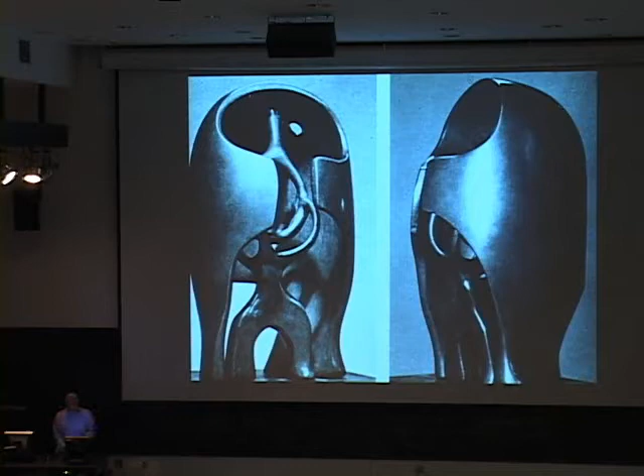In this case, there are two very different figures. So there's an exterior and an interior, and a zone of difference in between. Simply what we did is to label the outside of the helmet—the outside of the outside—the inside surface of the helmet—the inside of the outside. And as we move through these zones, the meanings change: outside of the outside, inside of the outside, and then there's a space, and we call that space the glue, which associates the inside of the outside with the outside of the inside. So it's the outside of the outside, the inside of the outside, the glue, the outside of the inside, the inside. And each one of those pieces obligates one another. They're different, they have different meanings, and in the aggregate, we have conceptually an architectural model.

This is a quick couple of minutes, since you've spent the last several years studying the history of architecture, so I'm going to save you a lot of time and tell you a little bit about how it was done and what it might mean. I think the premise is that architecture does not make its own argument by itself, but rather it associates or attempts to associate with cultural, intellectual, with artistic pedigrees already proven, and says, this is us, this is what we do. It makes those associations in a number of fields.

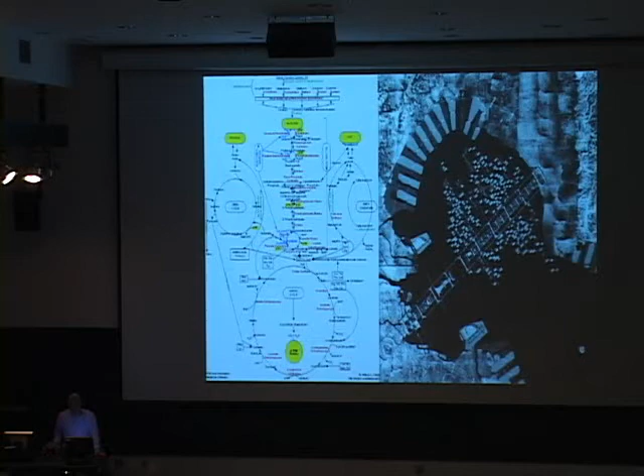In the 1960s, physiology and experimental work in the science of the human body, metabolism—so architecture becomes metabolism. That's Kenzo Tange in Tokyo Bay on the right.

A little bit later along, early to mid-1970s, Paul de Man, who has an interesting history as a literary critic, began as a writer in Western Europe when Hitler came through, went to Harvard, dumped his wife and his kid, did a number of unfriendly things, wound up at Yale as a literary critic. The only reason I mention that is that those who have discoursed on deconstruction have on occasion tried to explain it as de Man's way of deconstructing his own life—that is to say, of getting rid of it.

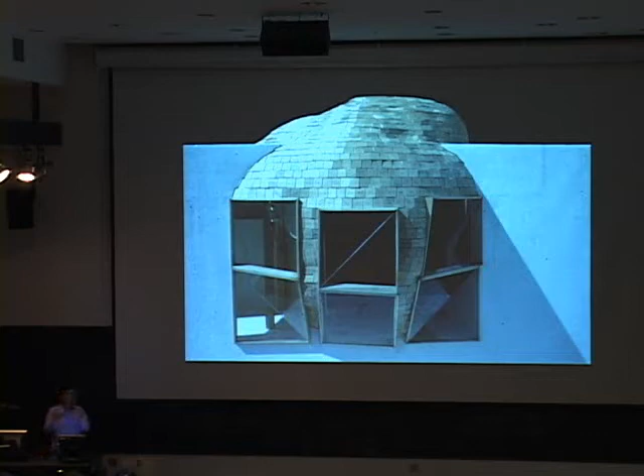We could approach it. We actually made plywood forms both on the inside and the outside in order to implement it. So what we're doing is learning how to draw it, and in the process learning how to build it. Maybe when we get to the end, we have it figured out. It has to do with joint size, edge to edge, and a whole series of technical issues.

Advent of the Rhino menu, for instance, makes the discussion very different, because a menu of this kind anticipates, or makes an effort to anticipate, that you can do this one and this one and this one, and you can do all of these things. So the catalog of possibilities is now available to you, but not 15 years ago in a menu. So it makes the delivery of the result a simpler kind of problem.

It's different to make something when you're not sure how to draw it and not positive how to build it. And there's a risk in that, in the sense that it may work and it may not. Whereas the advent of the new software might allow you to build the very same thing, but the meaning of the very same thing, whatever it looks like, I think is substantially different. It might be the image of something you don't quite know, but the tool is something we know very well, and I think the tool allows us to anticipate and to warranty what the lack of the tool didn't allow us to anticipate and to warranty.

And this is really the other side. I mentioned almost in that Mondrian comment, almost nothing and almost everything.

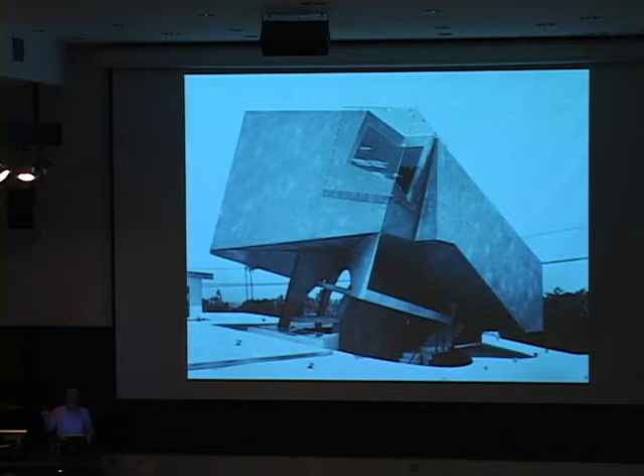This is something that we call the box, or unboxing the box, a little bit facetiously, because it's enough of a box to be known as a box and not enough of a box to be, in fact, clearly the box. And I think the box is a topic in the discourse on architecture in the last 100 years has first been a kind of ideal image, maybe in terms of the austerity quotient of Mondrian, and maybe in recent years a kind of a pariah. Don't make the box or unbox the box. The box is too easy, the box is too simple, the box is too predictable.

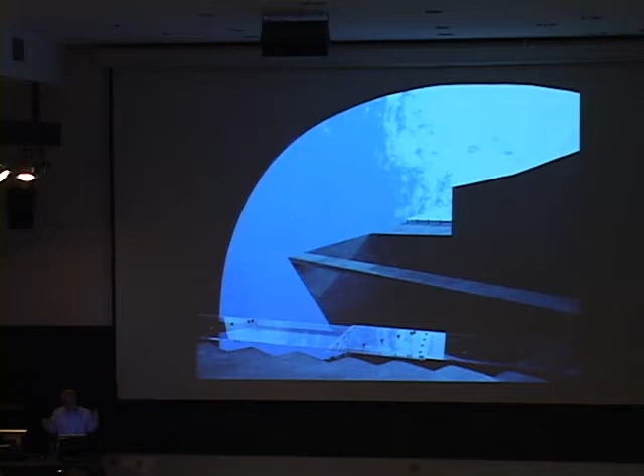So in that period of time, making Trivida and making the box, and in a sense covering all the conceptual possibilities between almost everything and almost nothing, in a theoretical sense, in those two projects.

This is a project that was done initially for the Los Angeles Philharmonic at about the time that it looked like the Disney Hall wouldn't be built. It was done for a group that produces something called the Green Umbrella Series, which is an experimental music series run in Los Angeles for a number of years and had no venue and needed one.

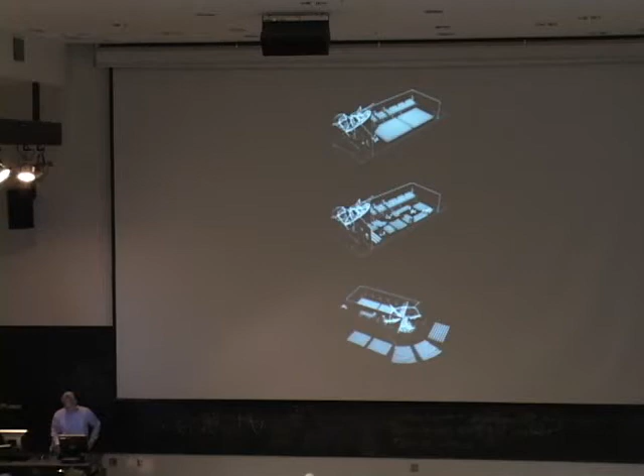Part of the operational problem was to produce a flexible interior. And the other part was to produce a kind of bandbox on the exterior for about 20 to 25 musicians from the LA Phil who would sit outside and perform.

You can start to see how the project was studied and made. There's a discourse with trusses: a new truss made out of steel, an old truss amended that belonged to an original roof, an existing truss which is exposed, and then this bent glass canopy.

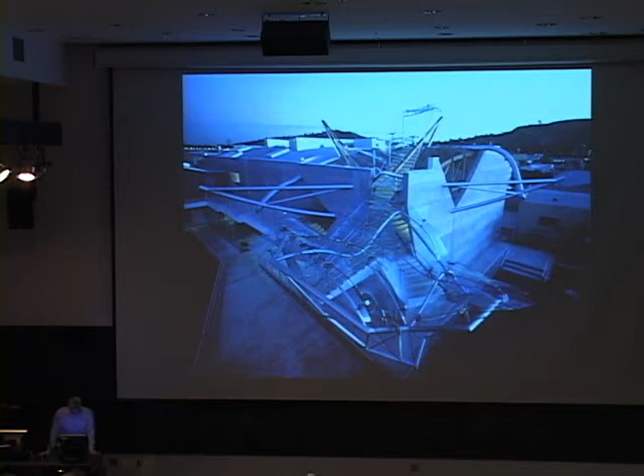I think this is the first time overhead bent glass had ever been done. You can see what we did here. It wasn't a certainty that we could make the glass, that we could engineer and fabricate it. We were told by those who always know: don't do it, you can't draw it, you can't bid it, you can't build it, you can't fabricate it, it'll break, it'll leak, and they'll sue you.

And all of that happened. Nevertheless, as your parents have always advocated perseverance, when it's 4th and 10 or something, we did that. You can see here we were trying to understand a form language that would allow us to fabricate this stuff. We finally found a fabricator near Los Angeles with some engineers in Paris and some others in Switzerland, and we were able to build it.

What's interesting to me is that people selling this glass now from Shenzhen and Guangzhou, from Cricursa in Barcelona, and other places can make this available to you. So, hey kid, you want to bend it, we can bend it, you want to twist it, we can twist it, no problem. It's not quite no problem, but the evolution of that discussion in a very short time means something interesting. It means that the time it was done and the result achieved, for better or worse, lawsuits, cracking, but it's up, is different than if we were to build it now under conditions for engineering and fabrication that have evolved substantially since that period.

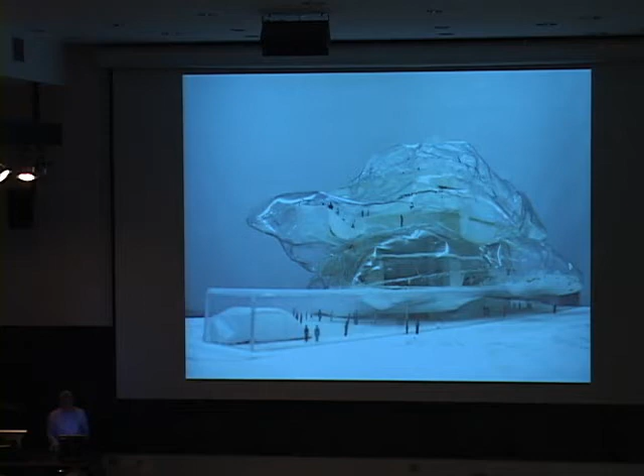This was the original proposal sketch for the project. Then we went through a series of steps working with Valery, among others, using a term you'll recognize: a module. Like the Trevita project with a block module, these are also modules. We called the modules the pillows, but the pillows are modules at a very different scale. They deal with sight lines, structure, access, and acoustics.

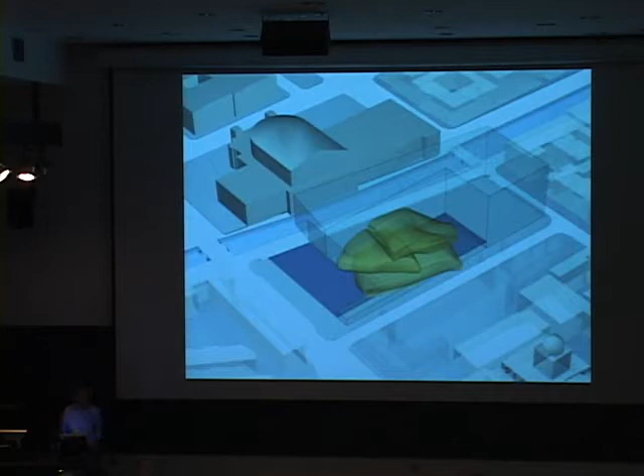So when you want to move it, you push it, bend it, stretch it—you do all of that. It's a malleable module, and we began to develop the project on that basis. This was an early study, and then a later study. The interior of this theater was asymmetrical, and then a clay model. You can see the tools—some are clay, some handmade, some printed, some milled, all of that.

This is a series of setting and dealing with the glass. In Russia we did two projects: one called the Iceberg, one called the Ice Cube—this being the Iceberg. The role of glass in this became a big topic, and a controversial one, particularly acoustically. At the time we were working with the Arup people in London. This starts to deal with—this won't go anywhere near explaining it—but this deals with acoustics, this deals with seating, this deals with the envelope, and this deals with putting all the pieces together.

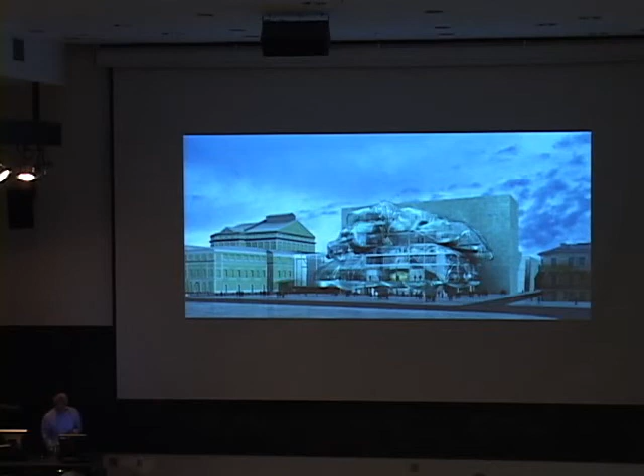So this was the solution that won the competition originally.

Then a number... the best thing to do, I think, as a lesson to you is until it starts to go up, you just keep it quiet. We were asked to exhibit it in the Russian Pavilion in the Venice Biennale, and really a lot of hell and controversy broke loose.

The ultimate result of that was the rerunning of the competition, which is this one, as you see here, modified to some extent.

But the premise we did raise, I think I mentioned this to Jeff, to the jury, was an analysis—whether this is facetious or facetiously unfacetious—that the 19th century Russian neoclassical building, which really belongs to France, divides elevations of buildings in very conventional and predictable ways.

And we went in and presented a kind of hypothesis which says this is why this building is analogous, appropriate, fits into the center of the city of St. Petersburg.

After the jury, Prix came up—he was on the jury—and he said, boy, that was a great speech. It sounded really great, sounded good, sounded convincing. And then I looked at the image and the argument went away. So, as it probably should have.

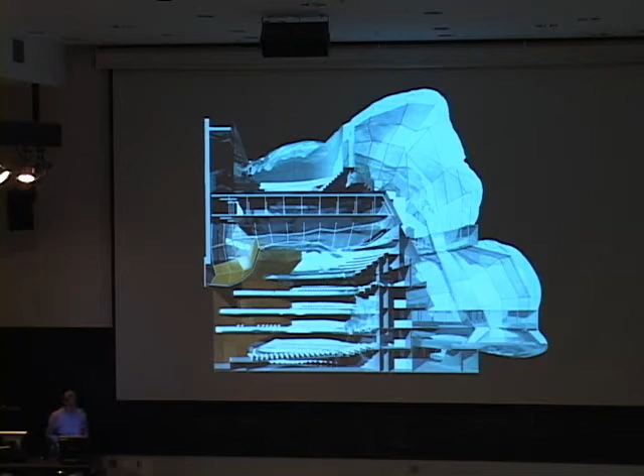Anyway, this is a section, and you can see as the glass condition starts to leak into the interior of the theater. This is interesting, and I'm not going to slow it down for you, but when we presented this, the model was actually made by the Arup guys in London. You can start it and stop it, and it purports to show the results or the consequences of the glass, which is a hard surface, on the interior vis-a-vis the wood and the cloth of the seats and all of that—making a case that the interior of the building was operationally intelligent.

So this was the second solution.

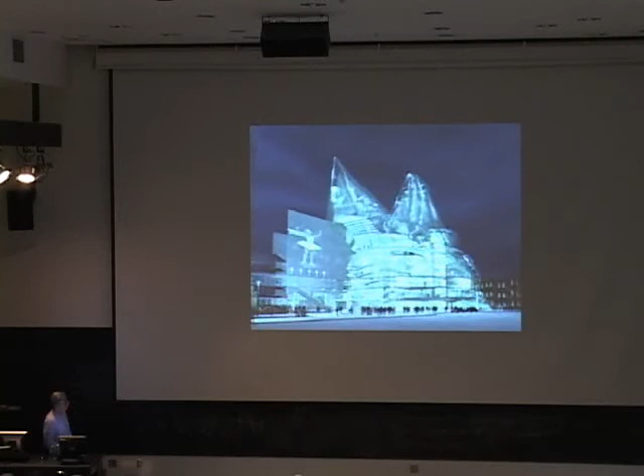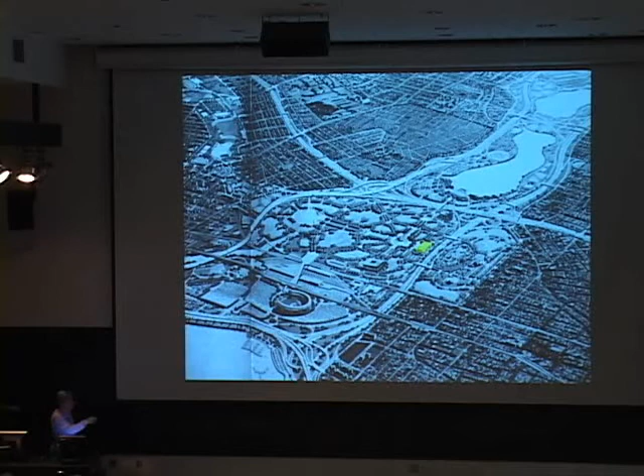This is a competition that we won in the early 2000s for the Queens Museum of Art. You may know the site, which very much belongs to Robert Moses. There were two World's Fairs there, one in the 1930s, one in the 1960s. Grand Central Parkway, Van Wyck, and this is called the New York City Building, which was to become a museum.

What was interesting about the ramp is it's always been of use in a public policy sense, because the general argument is that most buildings on most streets in most cities, or most buildings on most campuses, belong solely to the people who go there for class, for exhibitions, and so on, and don't belong to anyone else. Ergo, whatever special experience or knowledge or value there is in those buildings, which ought rightly perhaps to belong to a broader audience, doesn't—it belongs to a limited audience.

So what the architect did was run the ramp through, and while you're on the way from English to physics, you take the shortcut, and you see art, and you see sculpture, and you see graphics, and all of that, which you can either pass by or take another look. So it avails itself of a different audience, a different constituency, and it's an unusual way of integrating a private process with a public purpose. You don't see that so often.

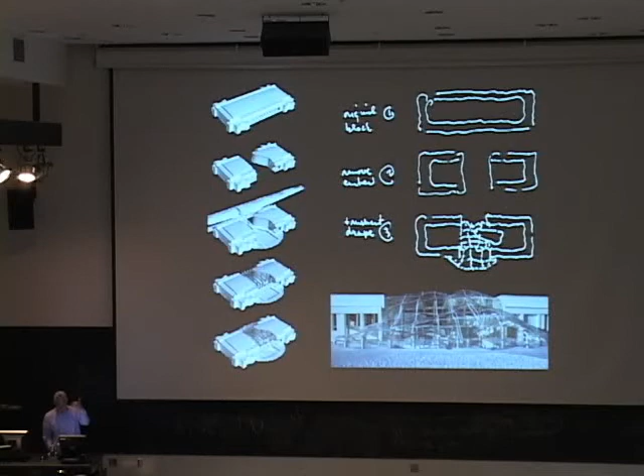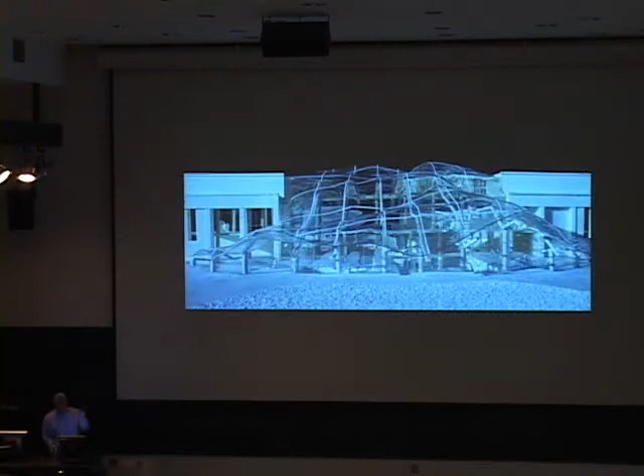I noticed when going through this that we have a pretty consistent habit of presenting work as a chronology, as a sequence. I think it's a little disingenuous, but from a client or audience point of view, it presents the project logically and consistently as a series of steps. You see that here: the existing building, then it was opened up, then a piece was inserted - existing building, opened up, acoustic mountain, and so on. If you accept the first step, the second follows logically, and so on. The excavated events belong to what was integral to the museum, and the on-grade areas were where the public was allowed to go through.

So we're going to hold on to the train station, which was used in an analogous fashion as the zoo was used for the Queens Museum, to bring people through the library. When you have an opportunity to do a project like the Kirov or the Mariinsky, or the National Library in Mexico City, it really elevates the discourse on architecture to a different level, because you have an opportunity to touch the culture and move the culture in a very particular way - to do something an ordinary building can't do.

In this case we had a consultant who is the librarian at Stanford University. I remember him saying to me about the Green Library, which is about as sophisticated a library in a technical sense as you can find. He said the students who come to Stanford - 99.99 percent - come with laptops. The people who come to this library in Mexico City, it's 0.9 percent that have laptops. So this project allows the architect, the city, and the culture to make available to this local citizenry, to the citizens of Mexico City, a whole body of new information, new tools, and an entirely different way to access, work with, and understand the world. That's a very special opportunity for an architect, and I think it really elevates its meaning.

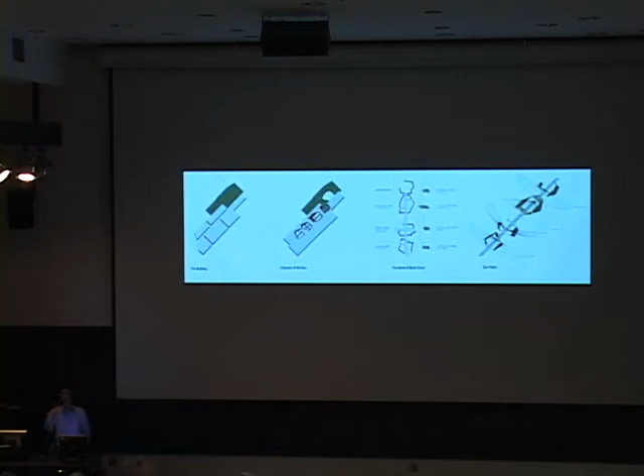These are a series of courtyards here, which are different. They belong to the seasons and to uses, so the form of the courtyard, the shape, the size, has to do with the movement of the sun. Typically buildings are handled in order to prevent the sun or prevent heat, so this is a little bit different—more sun, less sun, different conditions—so the courtyards reflect use and purpose as they do reflect the seasons.

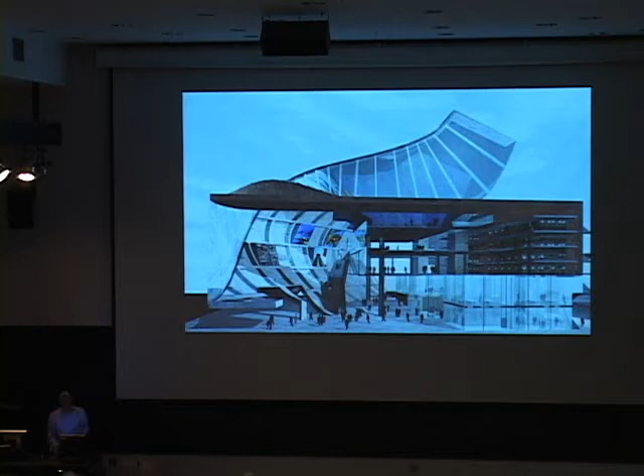This seemed to us to be something like some of the content you found along with that enormous walk at Teotihuacan. Anyway, these are the model studies, and then there's a big information visitor center and of course the requisite media center at the front of the project. This is the final model.

And then this competition we also won—this was '06, '07. The Smithsonian Institute next to the MCI Center in Washington, D.C. The building is a 19th century building, originally called the Patent Office Building, meaning models and drawings of, I don't know, Alexander Graham Bell, Thomas Edison, people like that would be recorded there, memorialized there. So if you want to see what Alexander Graham Bell did, you go in and you see it.

And when they gave us the brief for the project, they said, okay, this used to be the Patent Office Building, please make us a building in the tradition of invention and discovery, as the history of the inventions in this building documents. So I think we did that. I'm not sure they were comfortable with the solution.

So this has a different antecedent. This is from a painter you might know called Seurat, a French 19th century painter. One interesting aspect of his work is that if you study the paintings, the content, in a sociological way, is extremely conservative. You know the one on the banks of the Seine, and everybody's sitting in the right place, the right dog's on the right leash, everybody wears the right clothes, all of that, except it's done with this stuff, with the dots. So technique is different than social content—the social content conservative, the technique very different.

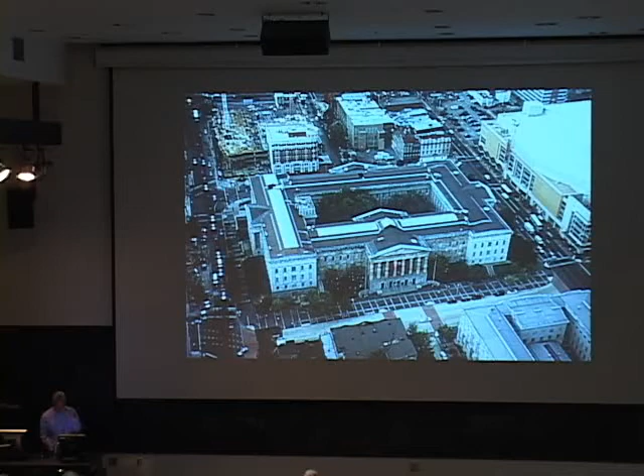So what I argued was extrapolating from this series of points to another condition here, which is a kind of roof structure, because the assignment for the project—this is during the Bush administration—was to make what they called democracy's room in Washington, D.C., because there was no sign of democracy's room in Washington, D.C., meaning put a lid over that space, and then we'd have democracy's room, presumably. Yes, this is what they said.

So this is a topographical diagram, not a topological diagram, of a combination or reconciliation of this venue and this venue. They wanted two demountable presentation and seating venues, and the mapping of the acoustics put together—don't forget this is not Carnegie Hall—but the mapping of the acoustics put together gave you this profile, which turned out to be the profile of the ceiling, because the pipes are used.

The pipes are 1 meter in diameter and somewhere between 6 to 12 meters in length, roughly speaking, and they're laminated glass—two pieces of laminated glass. We know absolutely how to do this, although they at the time were not convinced. There are supports on either side of the space. Here you see the Vierendeels, and then there's a cable and a tube, and the glass tubes are compression members that function structurally in the truss spanning between the Vierendeels, supporting what is essentially a glass lid over the top of all of that.

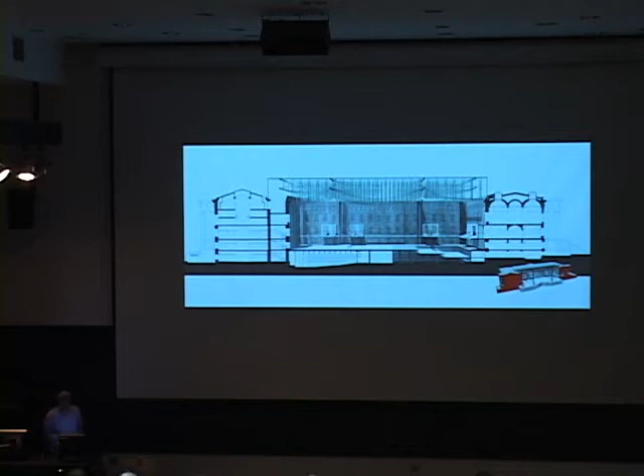This little diagram shows the tube, then the collar, another collar, and the cable. The compression member doesn't end at the cable, so the length had to do not only with a structural issue, but with an acoustic issue. There's also a whole series of ancillary pieces having to do with lights, plugs, cameras, and all of that. Essentially, this was both acoustic and structural, supporting the roof.

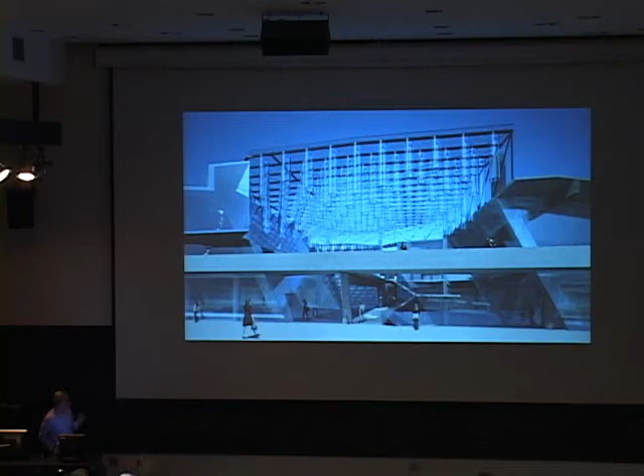This is a model I think we made later for the Biennale, but you can see Seurat in the background, and then this is the exterior and the interior with the glass tubes. By the way, our colleague and friend and client in Culver City saw that presentation, and we're now making a smaller version for him at a different scale, which surrounds a small courtyard. It's really commercial space in Los Angeles.

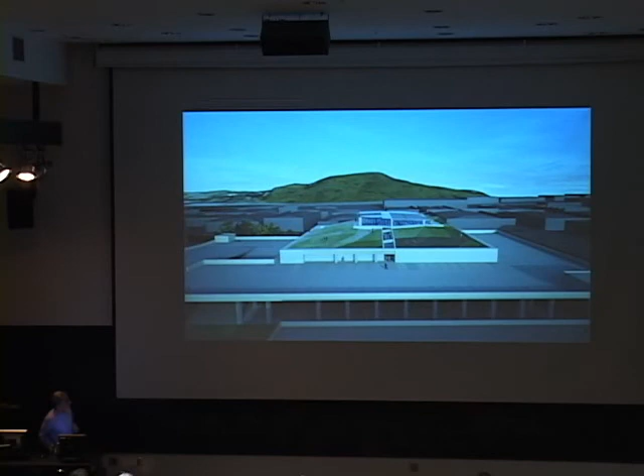So here we are in Guangzhou, a city. The whole conception of building buildings and building high buildings, or the conception of buildings as singly important, is a consequence of the fact that one building is different than another and might mean something different than another. I think you could argue a lot of that is lost as building upon buildings by the hundreds come flying down to the Pearl River here, which connects to the Pacific Ocean.

So this is the city growing toward the river. And then we proposed, wait a minute — this is the 'wait a minute' theory of urbanism, that let's sit on the commercialization of Guangzhou and introduce the cultural interlude of Guangzhou. Zaha Hadid has built this opera house here, and the site for the museum was on the other side.

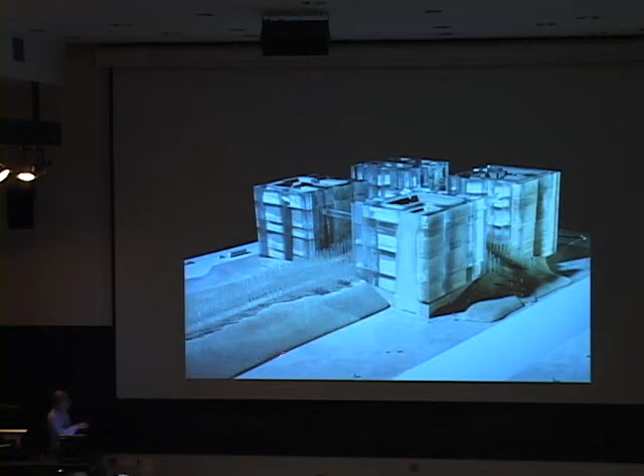Trying to see what I can see here. What we proposed actually is a mound, an earth mound that stretched between the two. I think you can see it better here. The program of the museum was broken into 4 discrete blocks, galleries, with a lobby and entrance in between. So you can see the mound, and then we made here what we called the glass forest.

We called that the long art march, and you can see that walk, so that this again is a barrier between the commercial world and the cultural world. The cultural world is certainly more of an introverted world. You can see the 4 gallery areas, and then you enter into this space, and then you go down it. Presumably, as you go along and as you go in, the further you go in, the more you're disassociated and dislocated from the omnipresence of the commercial world that surrounds you in Guangzhou.

I won't go through all of these details, but essentially there are 2 internal elements. One is that glazed condition, where natural light is possible. The other has to do with spaces that can't take natural light, and an intermediate zone between the two, which stores and supports both for outside that space and inside that space.

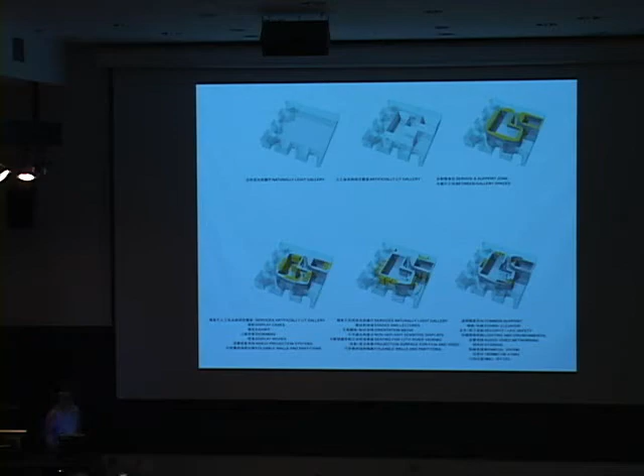I mentioned at the beginning the interest in architecture, the long-term interest in technique and assembly, and I didn't want to leave the impression that any of those prejudices that belong to that instant history of architecture are not also interests of mine. So I'm not claiming to be free of that. I'm only claiming to be cognizant of those things.

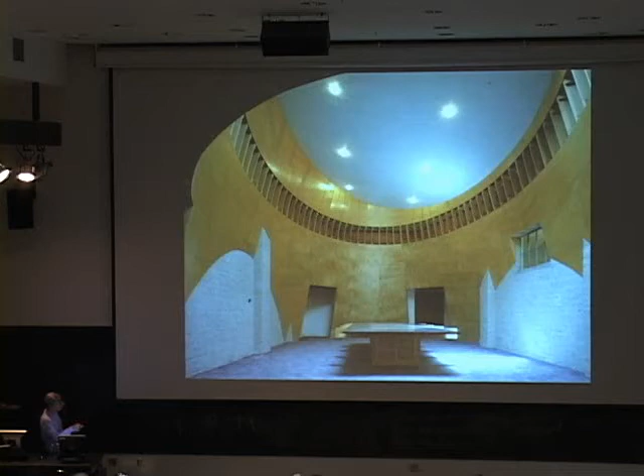It's a little bit dark, hard to see, but there's a ledger in here. This is a room made out of blocks, and there's a ledger horizontally put up diagonally, another one against the wall, and then sticks that span across that ledger, and sticks attached to those sticks that span across the ledger and attach vertically — so that what you see is a conclusion in a selective way. The ledger is in here, the horizontal sticks are here, the vertical sticks are here. So for a moment, in a selective way, you understand in terms of the technique how this piece was built, but selectively. And this repeats in a number of projects.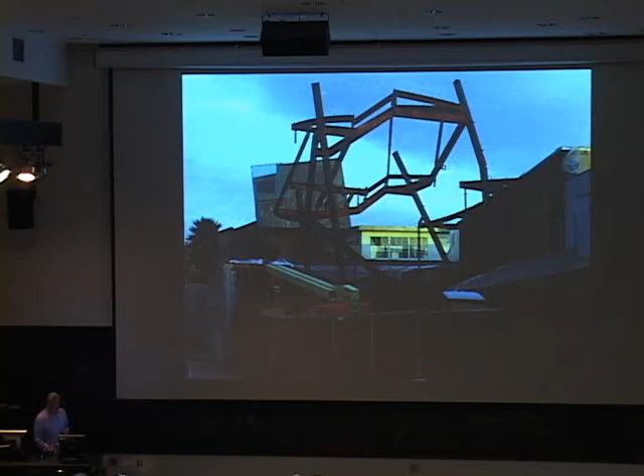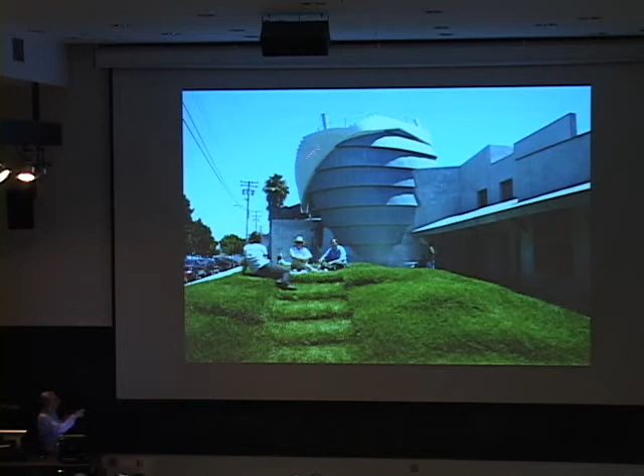A steel frame, which has 4 vertical tubes here, which incline at certain moments. And then to deal with the horizontal condition, a series of horizontal pipes. And then you can read that, at least by implication, on the perimeter. So tube and pipe and pipe and pipe. So at least by analogy, there's some, and then it disappears over here.

And then it reappears where the building is glazed on the entry side.

There's another point which I think is of some importance to me conceptually: you'll never get these buildings, you'll never know what they mean the way you understand the Champs-Élysées when you take a walk or a look down. Meaning it's not a single vantage point, it's multiple vantage points and multiple ways of understanding. So whatever you think or know, the way to the truth, to the extent that way exists in a building, is by looking at it from a number of vantage points.

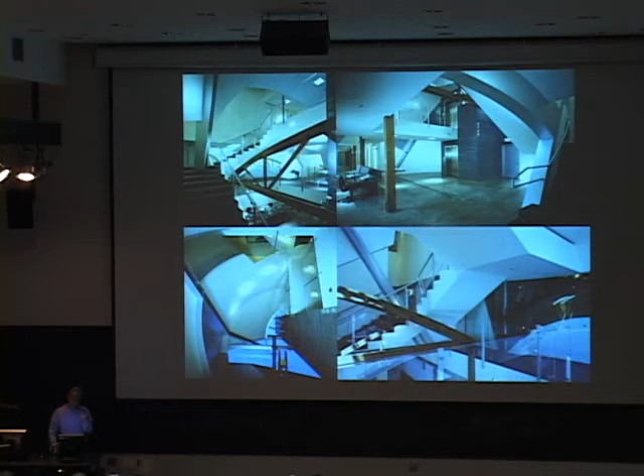Ergo, what we started to do is photograph the building from a number of different points of view. So this happens to be a lobby of an office building we made a few years ago, but seen very differently, meaning very different things. I think one could argue that understanding is both a function of what you see, what you anticipate, or what you recall seeing when you were standing somewhere else. And this is that building.

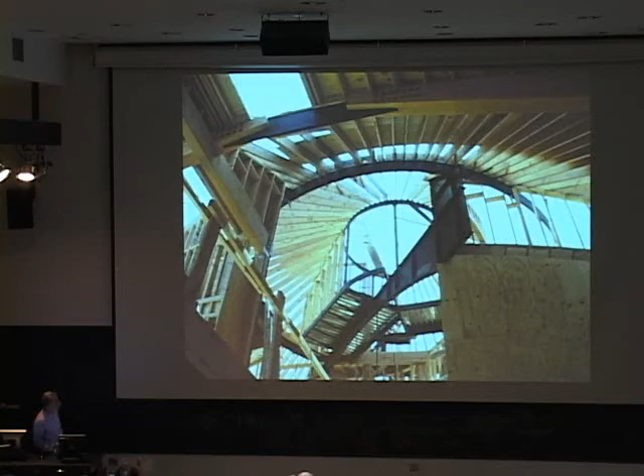And then again, this was a house we did a few years ago on the west side of Los Angeles. This photography at the time with Polaroids by Tom Bonner, trying to reassemble that space from a number of different vantage points. And then a building that we did in Los Angeles for Cineon Kodak.

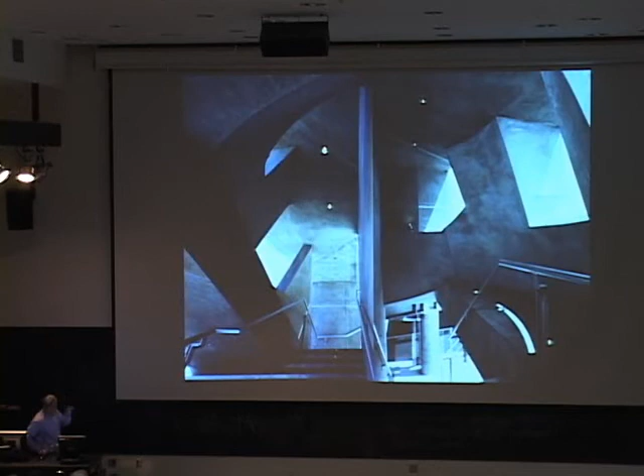Again, very different sensibilities, going down the stair, going up the stair. This was actually done in an alley in South Central Los Angeles, between 2 existing buildings. We raised a steel frame over that road, so it's essentially an air rights project, as you can see, and built the building in the air over that road, over the existing building.

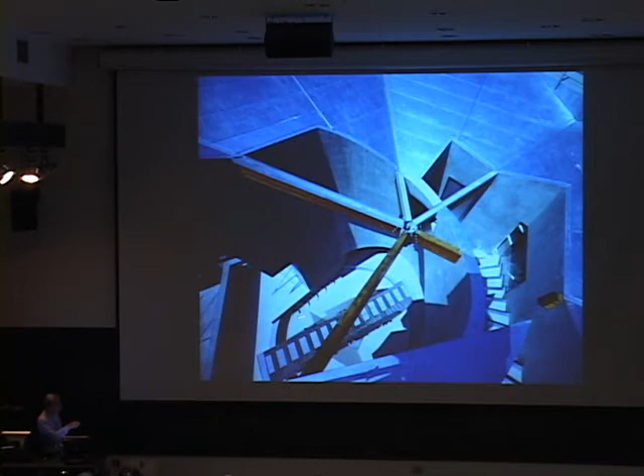There are 2 interludes, really, 2 courtyards. This is one of the courtyards. You're looking down on this bridge. You can see the water here. The water doesn't pile up in the pool, but comes out and then flows down a drain.

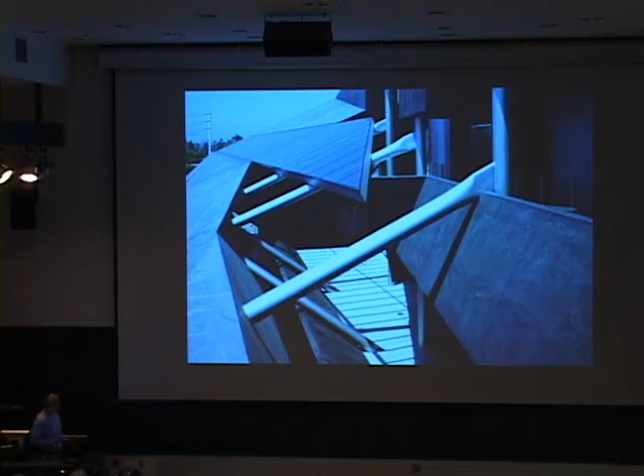This is the entrance to the building, and some of the kind of attenuated, crushed pipe as it intersects that column, and then the similarly attenuated window, and then the event space.

And I think what it does, and the hypothesis for this, was that every step you take is a different step in a different world. So from one end to the other and back, the building is something else, and something else, and something else, and something else. So whatever the guy's name was who said you never step into the same river twice, so there it is.

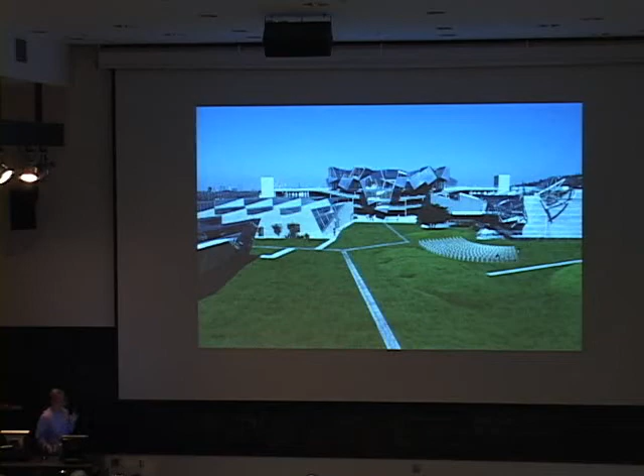You have to tell me if the meaning of this building would be different if we had built it without Digital Project, without building information modeling. We couldn't bid the project. It's not a big project, but it's inordinately expensive and complex. Now we can do it, so now we'll build it.

So as I said at the beginning with respect to the Trevita discussion, the 1,000 little blocks, the meaning of what you do is not only related to its content, but its tools. To what extent do you know what's coming, to what extent can you forecast it and warranty to your client that if you bend the glass, it'll bend and won't break. I think we're at a stage now where we can actually do that.

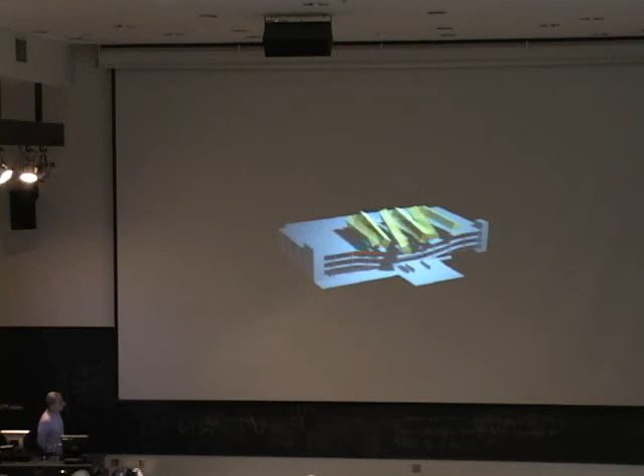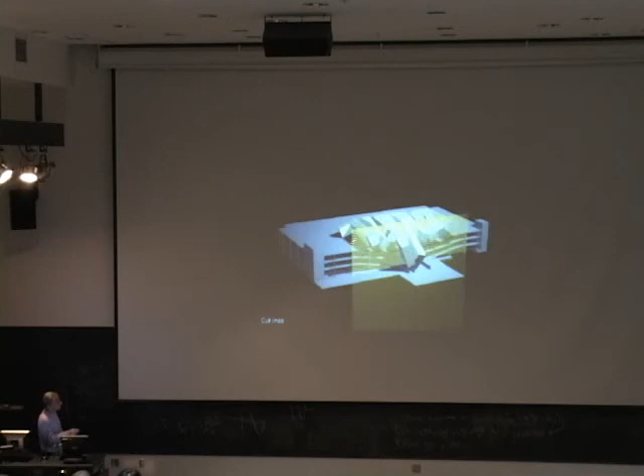So this is a little animation we made for the clients. This is the garage, which is built, and the program blocks. There are about 10 program blocks, having to do with cafeteria, private offices, computer facilities, conference spaces, things like that. The ground level, which is the top level, is open. This is now slicing off in terms of setbacks and height limits and so on.

Can you see that okay? It looks dim as hell from here.

So these are the skylights facing north. Again, the lowest level, which is the top parking level, you can see the glazing there, is essentially an open plan on that level. And these pieces, this is essentially a lounge that hangs over the entrance and welcomes you to the parking lot.

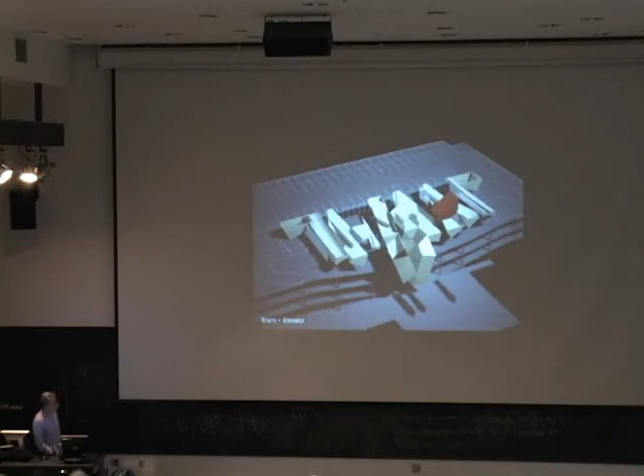Elevators. There's a bridge that ties those floor plates together on the second level.

Let me keep going, you can see it next time. This is a project that we proposed in a place called Almaty, which is a city of about 2 million people. It's not the capital, or it no longer is, in Kazakhstan, which is just west of Xinjiang province in China. And to keep it simple, this is what essentially is the program.

And the program is now this euphemism, mixed use, whatever exactly that is, which has something to do with housing and something to do with office and something to do with hotel, all of that, conference space, retail, everything.

And the spring—actually, I noticed you got Guy coming in here to talk. He was the engineer on this, and we started to—this is earthquake territory, seismic territory.

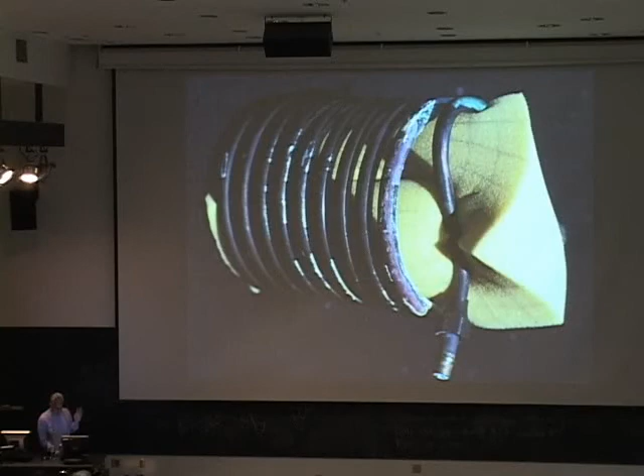You might take a look—this had something to do with Guy's work as well—that what was essentially a pipe structure evolved as it makes its rounds in terms of the structural condition or stress on various points of the pipe, which varies when it's more or less horizontal with respect to what it does when it's more or less vertical. This is a study, a series of study models by hand, by CNC.

And then even when we solved the earthquake in this direction, we needed to solve it in this direction. So it's buttressed essentially laterally, as you can see—those are actually condo buildings.

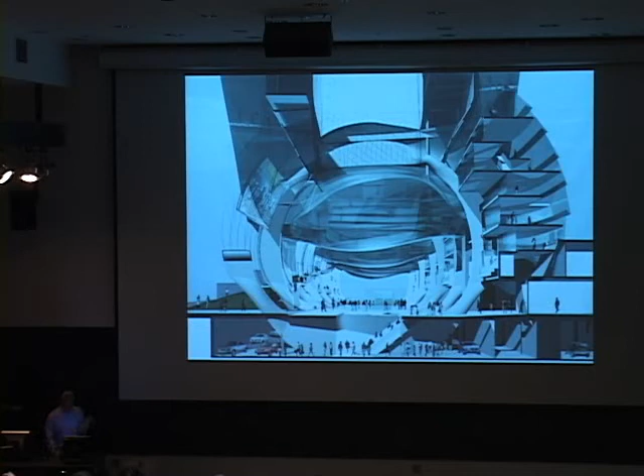And so this was the project, which also has a very important spatial connection to what they call Republic Square, so that this space on the ground floor, which wasn't part of the brief, can be used for public events when it's too hot or too cold. Mostly it's either one or the other in Republic Square.

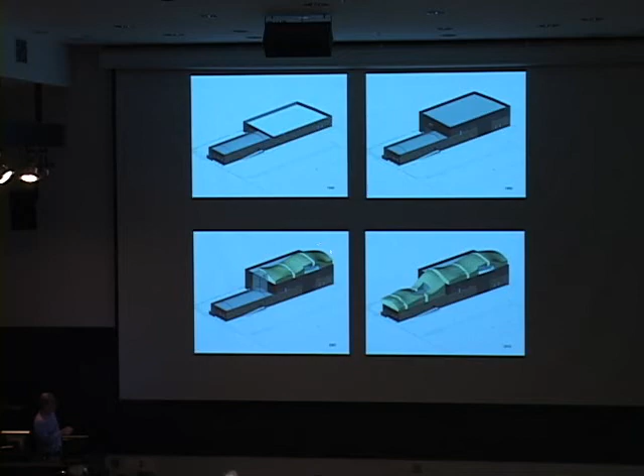This is another project which has, I think, a peculiar history as a piece of evolution, starting here. And then in the 90s, we added a sound studio, a production studio, to this 1930s warehouse. And then later on, added a series of offices. This is for a company called the Tennis Channel.

And the pieces were numbered, which ought to make the assembly pretty simple, assuming you can count. So of course, when they put it together, you know, 1, 2, 3—they got a few pieces in the wrong place, but conceptually, anecdotally, it's a little bit funny.

But in fact, it allows us to do now what would be extremely rare, not to say unprecedented—to make a building out of pieces where every single piece is different.

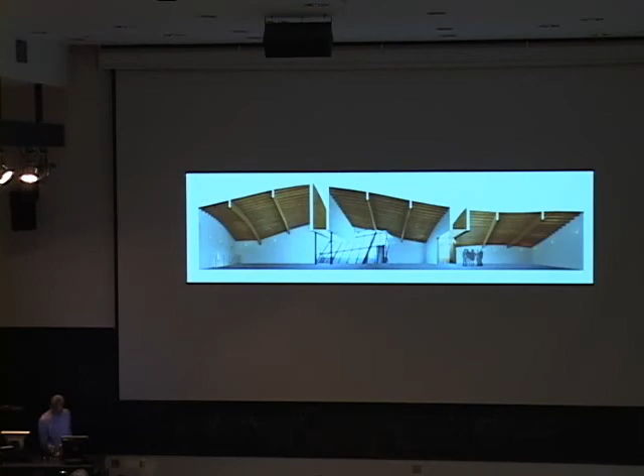And this is plausible, so this is under construction. There are actually 3 sections which have to do with a division, operational division, in the Tennis Channel's office spaces. And then it was covered with—this is another one of our experiments.

So this is something we made in the office. It's fiberglass blown on the building. And we were trying to figure out, because it's very inexpensive, and it goes around corners and over bumps and things like that, it expands and contracts in a way that you have to be very careful of, with seams and laps and joints and so on.

And ultimately—that's the piece on the top, which is the fiberglass. I don't think that's been done. It's been done in the shop and then installed, but I don't think it's been done in place.

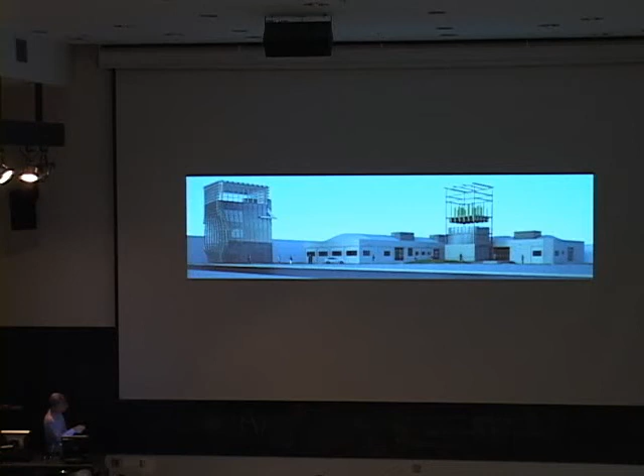We talked a little bit about this in Jeff's seminar, so I'll just touch on it briefly. This is what we now call Cain and Abel, a site in Culver City on the west side of Los Angeles, with a couple of existing warehouses, a little restaurant, and about a 60-foot high tower which used to hold an industrial press. The proposition is really two identities and two towers which exist strategically and conceptually in opposition to one another. We remodeled these spaces, and this is a garden and an enclosure that belongs to these people.

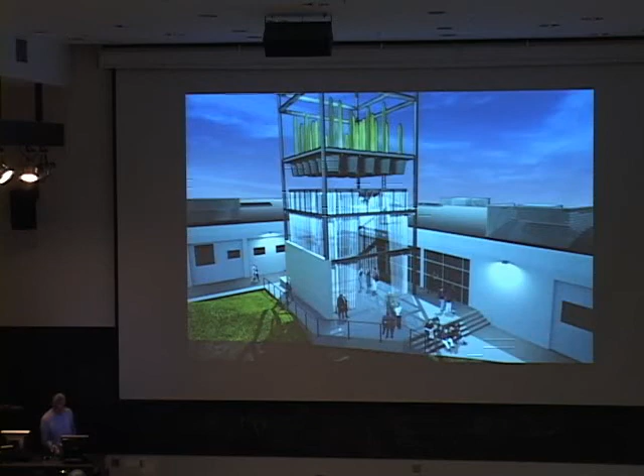It's actually a graphics design company that came to LA with a branch from Chicago, and you can see that interior space with the garden in the sky, which has a quality that, at least for me personally, over a distance, is so anomalous and such a surprise. In LA it's been identified as an advocacy for green, and I guess the cactuses are green, so if somebody wants to label it that way, it's probably a plausible label. But what was in my mind was the displacement of something typically found in one place, now understood as part of a vista at a completely different elevation.

We used, in a structural way, a replica of the glass which isn't yet built, but you can see the slots in these steel pots which hold the earth and hold the cacti. There's a cable that runs through there, and the slot gets less and less as the cable spans from side to side in the steel, supporting the bottom chord of the truss, with the top chord being a steel T, and the pot being both a compression member and the load which the cable has to support. So it's both the load and the structural member in compression supporting the load. That's the idea that comes in.

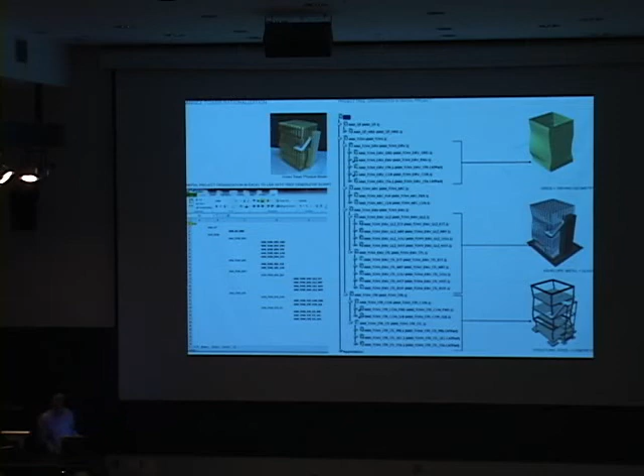And then we're back to this discussion again, vis-a-vis the little tower, which we also had a very difficult time bidding, and now with new tools. So when a steel fabricator—five steel fabricators—get these drawings, they have every piece, every size, every weight, every joint, you can't miss it, really. And because it's parametric, you make an adjustment of one piece and all the other pieces will adjust. So I think this will allow it to be built in the next few months.

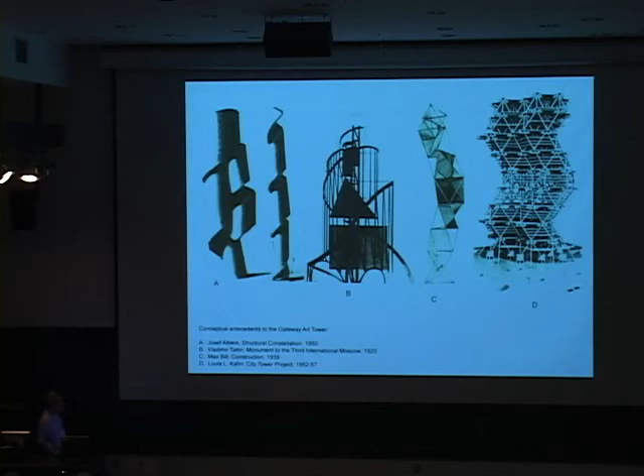This is what's called the art tower, which was done about 8 to 10 months ago. Still not complete in terms of operation. I think it belongs to a whole series of speculations about the meaning of buildings like this. I think it owes its presence on the landscape.

There it is, next to the box, and this we also talked about—the advent of a train, which typical of Los Angeles is way late. I mean, not the train, but the train will be late too. The construction of the train, by the way, is essentially a 19th century train. If you've been on the train from Shanghai to Beijing, it ain't this one. Nevertheless, it's a train, and it goes by this piece.

So that piece, as a point in the landscape, as an icon in the landscape, identifies this area and can also produce information. So if you're sitting in Sendai or Fukushima and you've got some images, you send them to the editor and up they go on these rear-projected acrylic screens. There's also a little seating area there for about 150. There's a balcony here and a screen facing this way. You can have little talks. If you stretch it into the parking lot, you can talk to about 1,000 people.

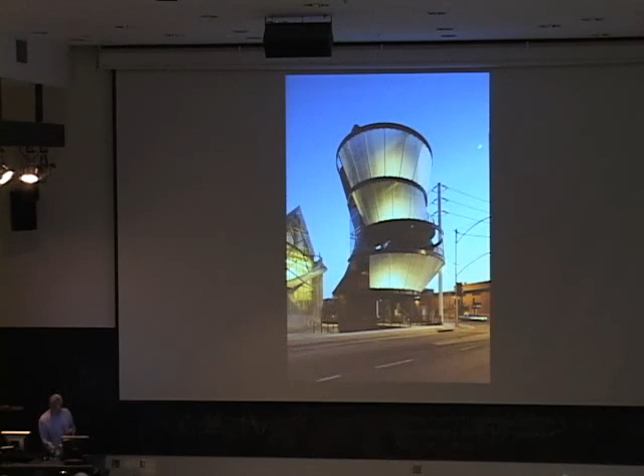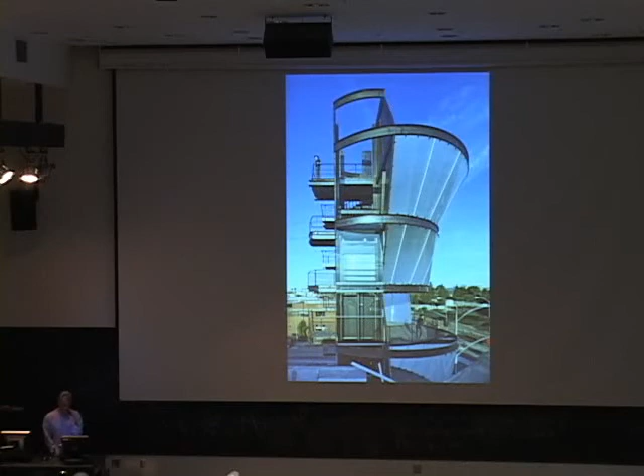The permission to do the project was contingent, for the owner, on no commercial use—so no commercial use is allowed on the project. We're experimenting with various media. There are a number of projectors, all rear projectors, there's sound, and there's a connection to the internet.

So it has the usual versatility. I think the difference is it's not just a screen on a wall like the Ginza or Times Square, but it is itself a shape and a space which has additional uses.

Getting close to the end, I wanted to mention a couple of things. This is a project we did about 10 or 12 years ago called the Dancing Bleachers, done at the Wexner, with the purpose of presenting something antithetical to the original architect, who seemed to make a poem to the ubiquitous grid.

So this is the early grid, Hippodamus of Miletus, the first urban grid supposedly. In his hands, it's the grid, the folded grid, the bent grid, the elongated grid, the grid, the grid, the grid.

Part of the argument for the grid is that it doesn't admit a center in a geometric sense. So we introduced what we call the analog to the Hippodamian grid, which does admit, at least hypothetically, the curve of centers. So centers against no centers.

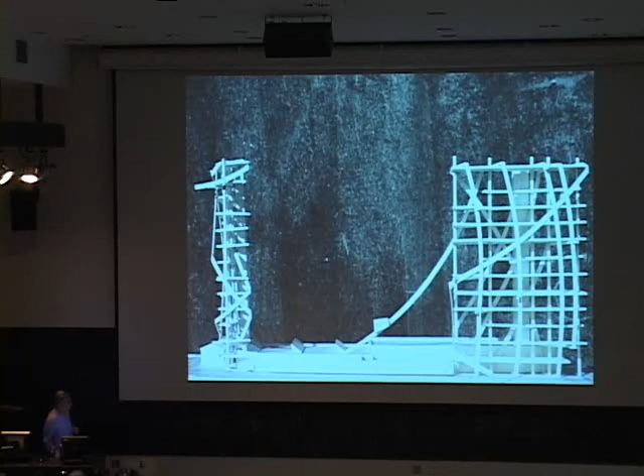At the time, we were asked to do a couple of high-rise buildings in Los Angeles, around 2000, 2001, 2002, which then sat until very recently. Comes the train, and the projects now came back.

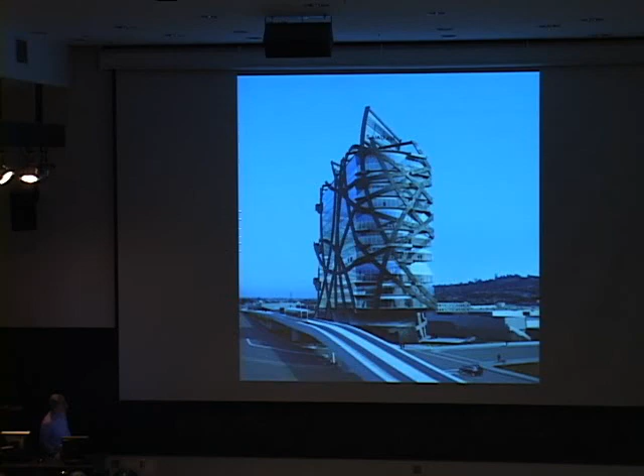It's a little bit different now. We're in the process of engineering this project, and we should be starting the construction of the garage any minute.

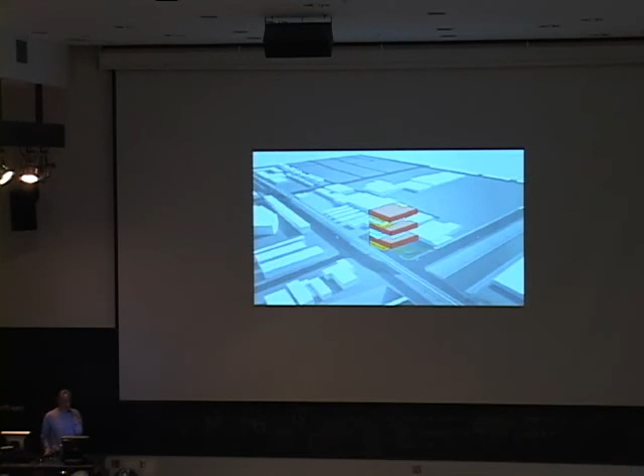This animation was done—there are a number of unusual things about the tower, but the argument in a commercial real estate sense is you buy large volumetric spaces that you would also like to have on the ground, but you get to have them in the sky. There are three different heights: 13.6 floor-to-floor, 16.6 floor-to-floor, and 24-foot floor heights, as if those typical warehouse buildings were what you had, piled one on another.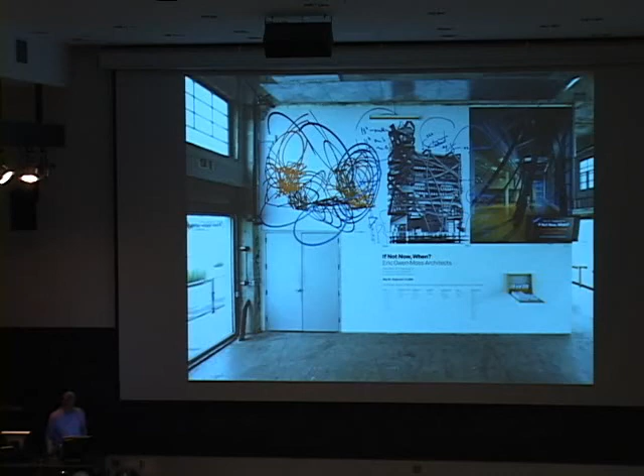So this was the argument for the animation. And then we made an exhibition of the history of that form language, starting with the Wexner, then going to the tower, then to this plasma cut installation, which finally came to rest in the Flak Tower in Austria, which is this.

And this is the discussion we had, and that form language again, with a plasma cut installation in Los Angeles.

So the last group belongs to a project in a place called Weihai in China. We were asked to do this—not a competition, but simply to make a tower, a kind of Eiffel Tower analog. Weihai is about an hour flight due west of Incheon in South Korea.

Typical of the Chinese, they're essentially remaking an entire coastline. It's a little bit unbelievable, but I guess it's not—they're making all of this kind of zippity-doo-dah, whatever you make of that. And they have a half-hour animation made by some German, which promotes the efficacy and intelligence of all of that.

But anyway, there's a mound here with a tower, so they asked us to make this tower, which has very little in the way of operational content. There's a base and a gathering area, vertical circulation and structure, a little bit of office space, and of course an observation deck and restaurant.

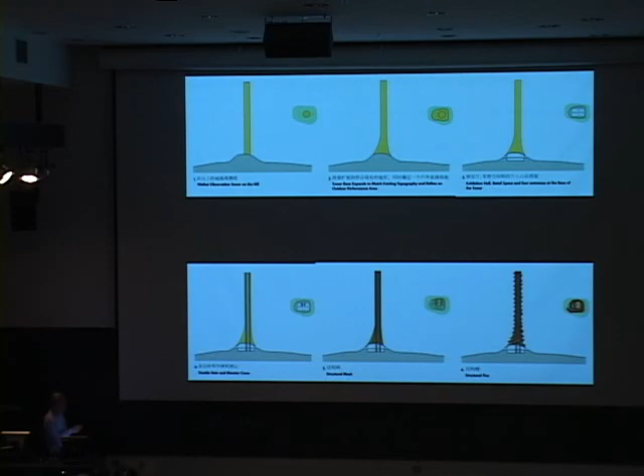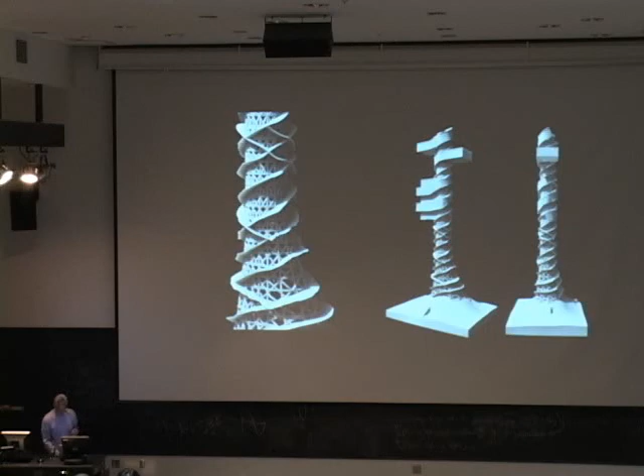So it has a kind of iconic aspect, and this is the print we made. I have to go next week, and we'll see how it goes.

Meanwhile, roughly the same time, we were invited to make a project, strangely enough—this is the site—with very similar contents, but much larger. We use a not dissimilar strategy, now making the landscape, integrating the landscape with a structural system.

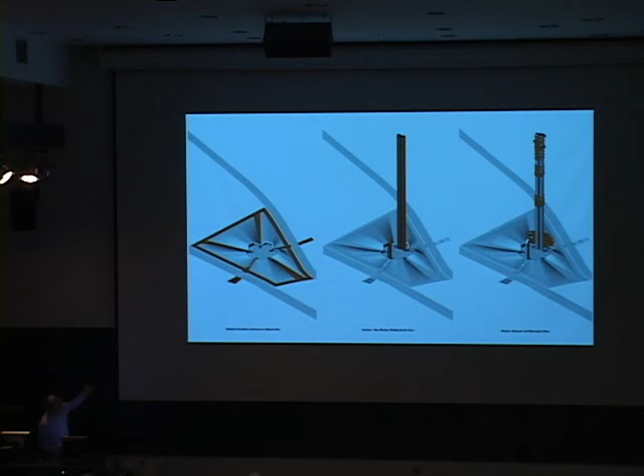There's a museum at the base, and you can see the structure that holds the museum, and an outdoor amphitheater, which was part of the Taichung program.

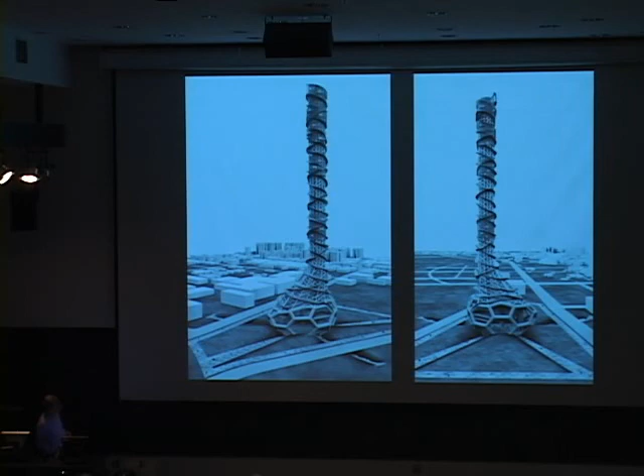So this is that tower in Taichung, and the interior space. The museum is supposed to be a huge space, and it's supposed to be an urban museum. Why they would need an urban museum, we could debate, anyway.

The last project is one that we just finished, and since we started with something very small at the beginning, this gives you an idea what we're doing at the moment.

This is in Vienna, the Danube River, the School of Arts and Architecture called the Angewandte, where they held an invited competition to remodel and remake the school while leaving the existing buildings. There's a 7-story building done in 1965, a 3-story entry piece, and a four-story building done in 1875, where the conjunction essentially bangs one into the other.

There's an interior courtyard here—this is the beginning of a solution. This is the existing building, which borders on a canal that runs to the Danube. This is the second primary building, also from 1875, and the link or connection between the two, where you enter, is that 3-story element.

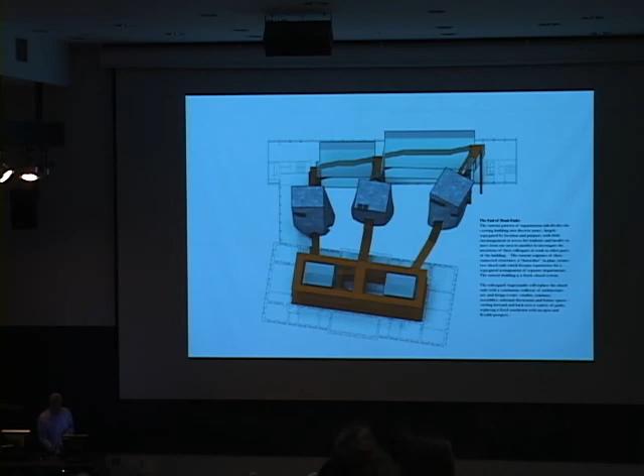For purposes of exegesis, this has been taken down, but you can see the courtyard, primary circulation here, and then offices and studios on the perimeter.

This is the 1875 building, and this is the Ringstrasse. If you moved off the Ringstrasse, you would reach the MAK, the Museum für Angewandte Kunst, which is here. Part of the proposal had to do with facilitating that, so you could go in here and through here—a little bit like the Queen's Museum argument—into the MAK Museum.

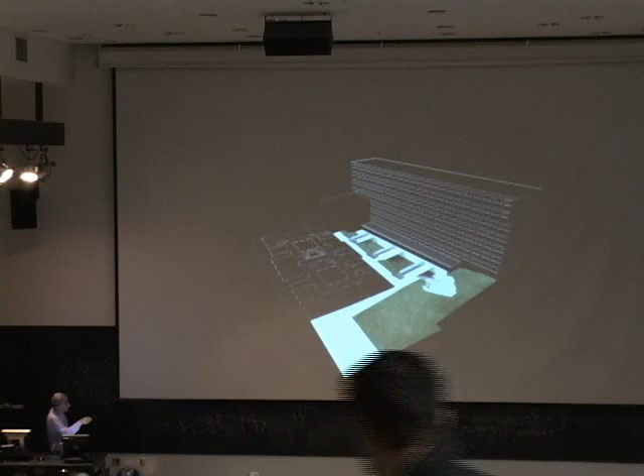So we started to work on the courtyard, which had been essentially a flat site with 3 buried or partially buried structures, a walkway through here, and a sloping landscape. You're in this building, walk out of it, down the landscape, onto the roof of these buildings. It's actually very intricate in a kind of IQ sense, trying to fit all these pieces together.

We then added a block on the other block, attaching the two with additional square footage. So again you have the walk, the partially underground buildings, and this new element with an opening here, which will welcome a series of connections from one side of the courtyard to the other.

These are the connections: bridges suspended over the courtyard, glass bridges, a series of stairs, understood a bit like the system you have out here, or the Spanish Steps, where you can go to and from, hang out, go laterally, hang around. At very different elevations, you see back toward the center of the city as you reach the higher elevation.

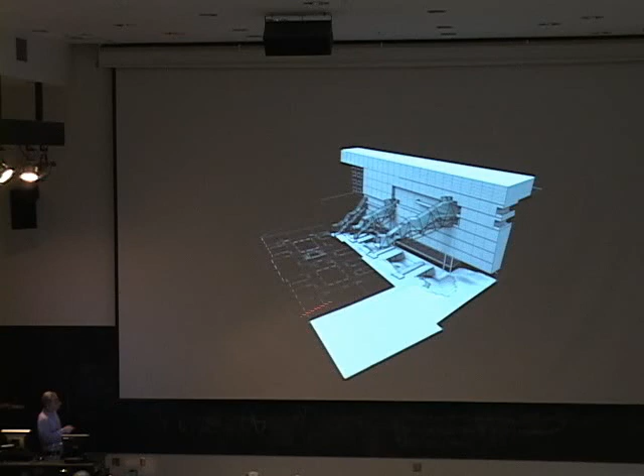And then these are the pieces we call the birds on the wires—event spaces that are gathering areas, seminar spaces, and things like that, which connect or hang over the courtyard and are part of the system that now runs continuously from building to building.

Then we made a partial canopy or cover, glazed here, which takes its shape as a cue from the mansard roof that surrounds and covers this building—so that shape, by analogy at least, is an inheritor of the form behavior of this roof, and then it leans on that roof, partially covering the space.

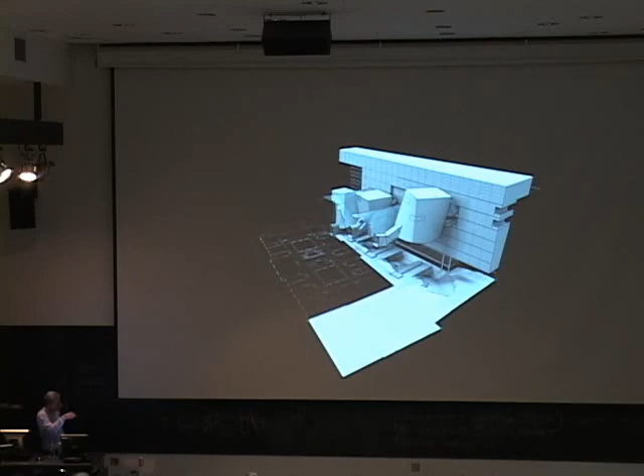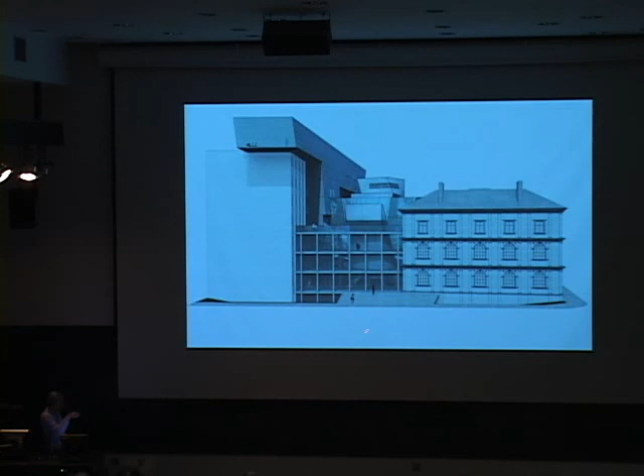Meanwhile, the end in this, which is the south, is open to the south and natural light, and so on. And in the front of the building, which had heretofore been essentially closed, we proposed to refenestrate it, opening it all up, so that from the front and the entry bridge, you could see through the building and everything going on in the interior of the courtyard.

This is the courtyard, and there's a small gathering space in that landscape, which opens through this gate to the land and to the MAC.

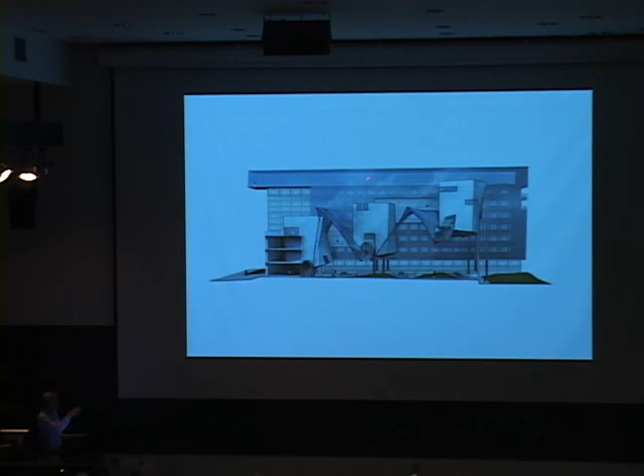And then in section: the birds and the shed roof and the wires, and the new building attached to the old, which overhangs the front. Then from the courtyard end, the existing buildings and the submerged landscape, the walk, the theater.

And just in case you missed any of that, the construction manual is available on request.